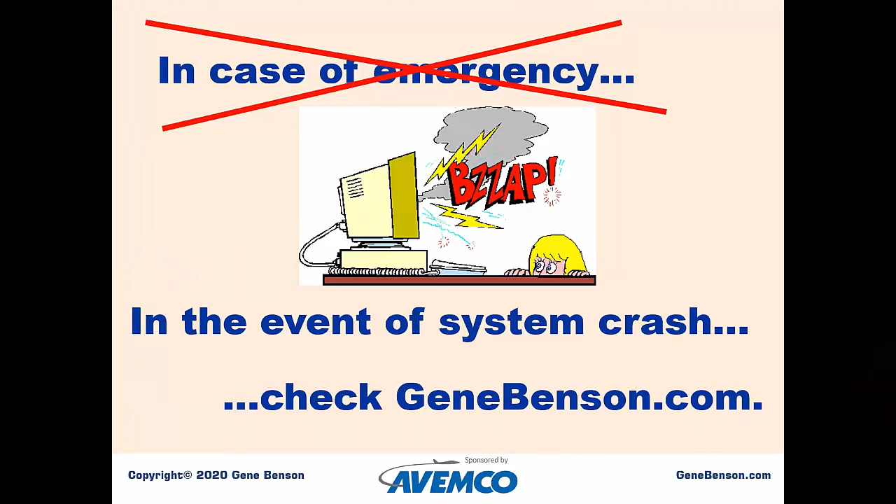If you don't know me, I am Gene Benson. A really quick introduction of myself: my whole life has revolved around aviation. Can't remember when I didn't want to fly. I took my first official flying lesson at age 14, and soloed on my 16th birthday. That was in 1962, so those of you who are math majors can figure that out. I had a great career for which I am very thankful. I've flown everything from jets to Cubs, everything in between. Flight instructing has always been my preferred activity, though as my mother told me, that's very dangerous - but I found out it was dangerous because you might starve to death, as opposed to other reasons. I always had other things going on, but that was my favorite. I've given more than 8,000 hours of dual instruction.

I've continued with my psychology background to do work in human factors. For 5 years I served on the safety committee of the National Business Aviation Association as the human factors person in their fitness for duty working group. I was also an annual presenter at the NBAA convention for a while. I'm a FAASTeam lead representative, and enough about me.

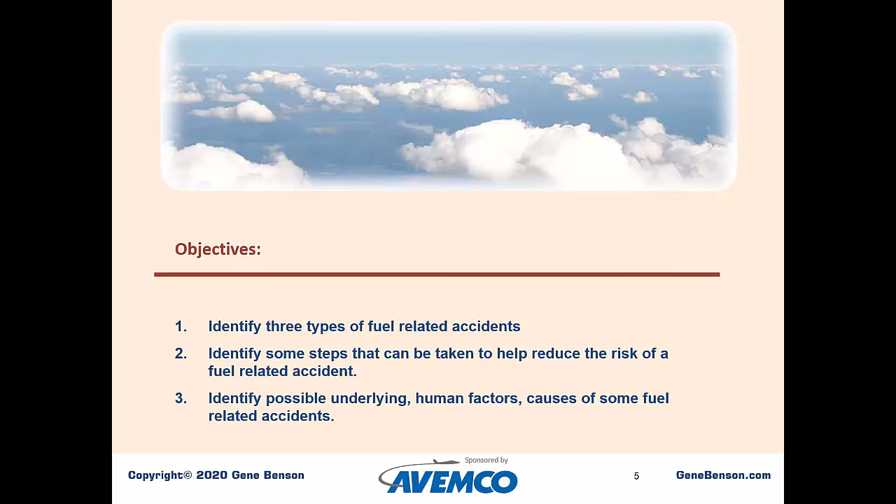Our objectives today: we want to identify 3 types of fuel-related accidents. We want to identify some steps that can be taken to help reduce the risk of us having a fuel-related accident. And I want to identify some possible underlying causes of some fuel-related accidents. Those of you who know me know that's going to take a human factors turn.

I really don't like beginning a presentation with statistics, but we do need to put this in perspective. This graphic is from the most recent Joseph T. Nall report, dated 2016, covering data for 2015 - not real recent, but it's the best we've got. Note that we're only looking at non-commercial flying and fixed-wing aircraft here. The report covers all kinds of things, but we're just looking at this.

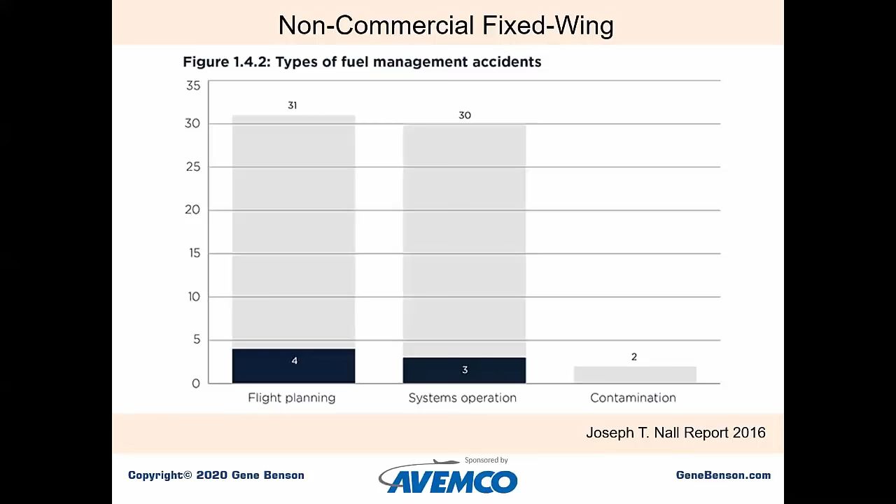This slide addresses 3 types of fuel-related accidents. They call it flight planning, system operation, and contamination. I'm going to call them a little bit different, but you'll see. The numbers are a bit hard to read because they're small, and we have some people attending by audio only, so I will state them. Fuel-related accidents that arose from flight planning, or a lack thereof, totaled 31 for that year, with 4 involving a fatality. System operation accidents totaled nearly the same, at 30, including 3 with a fatality. There were 2 accidents resulting from fuel contamination, and neither of those was fatal.

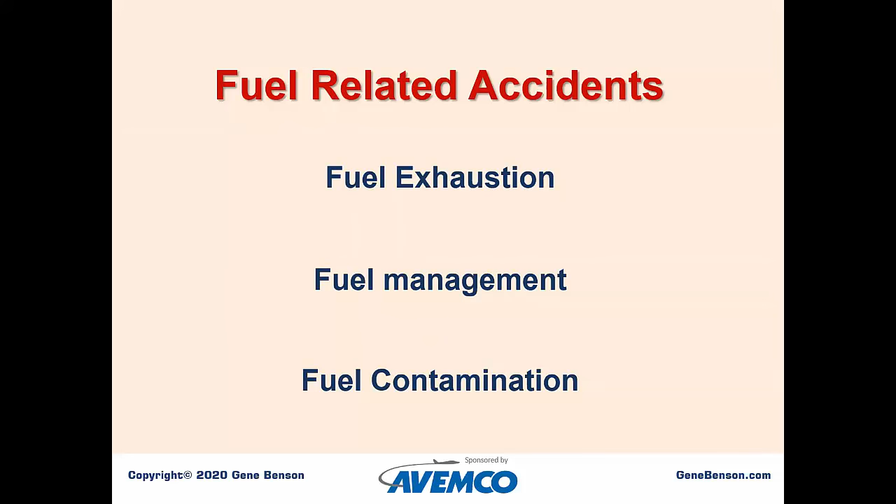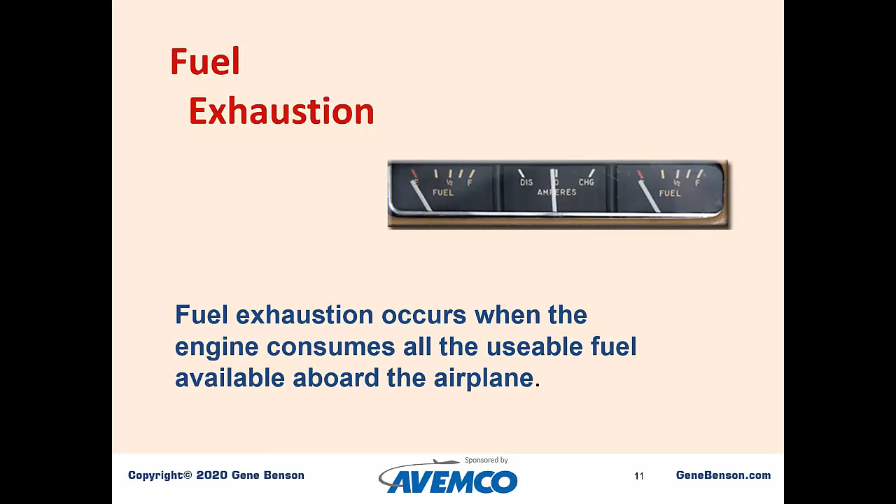We're going to look at fuel-related accidents in basically the same way, but we'll use this nomenclature: our 3 types will be fuel exhaustion, fuel management, and fuel contamination. Fuel exhaustion occurs when the engine consumes all the usable fuel available aboard the airplane - I've referred to that as having too much air in the fuel tanks.

This fuel exhaustion accident involved a Cessna 182, happened in Vermont in September 2013. The pilot and his passenger received minor injuries. Though the official report calls the injuries minor, the 2 men involved probably didn't think so at the time.

Now, before I go on with this, those of you who have followed my work know where I'm going. This 1962 airplane was not equipped with shoulder harnesses. The harnesses would probably not have prevented the broken wrist, but the severe lacerations probably could have been avoided.

I have vowed never again to fly in an airplane that's not equipped with shoulder harnesses, and I would encourage everybody else to do the same. Any airplane, I think, can be retrofitted with at least front seat harnesses relatively inexpensively as things go in aviation. And the statistics on survivability, not just survivability but avoiding serious accidents, is just overwhelming that shoulder harnesses are really important.

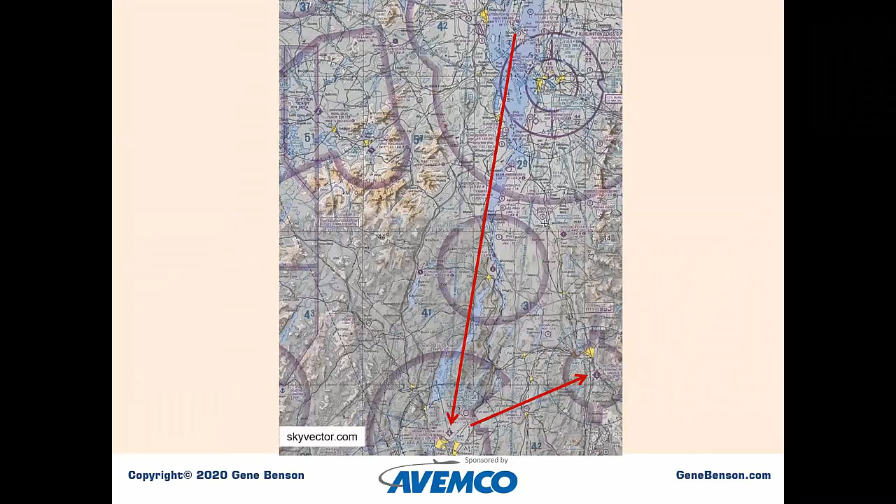This is a closer view of the area showing the proposed diversion route. The NTSB report states that at the time, he noticed that the airplane's fuel gauges were bouncing off empty. That is not a good situation to be in.

And I've flown a lot around that part of the world, and the landing sites there are few and far between. The airplane subsequently experienced a total loss of engine power due to fuel exhaustion, and the pilot performed a forced landing to a field, which resulted in substantial damage to the firewall and forward portion of the fuselage.

The pilot stated that he did not experience any mechanical malfunctions with the airplane, and had he received a full weather briefing prior to the flight, he would have known about the closed airport and planned accordingly. Sounds like an expensive lesson to have learned.

Our pilot was 65 at the time of the accident. He holds a private pilot certificate, single engine land rating. At the time of the accident, he possessed a current Class 3 medical certificate, and he had a current flight review. He reported to have 3,654 hours total flight time, including 2,852 hours in the Cessna 182.

So it certainly seems that he should have been familiar with the rate of fuel burn in that airplane with all that time in it. And that might just be the problem.

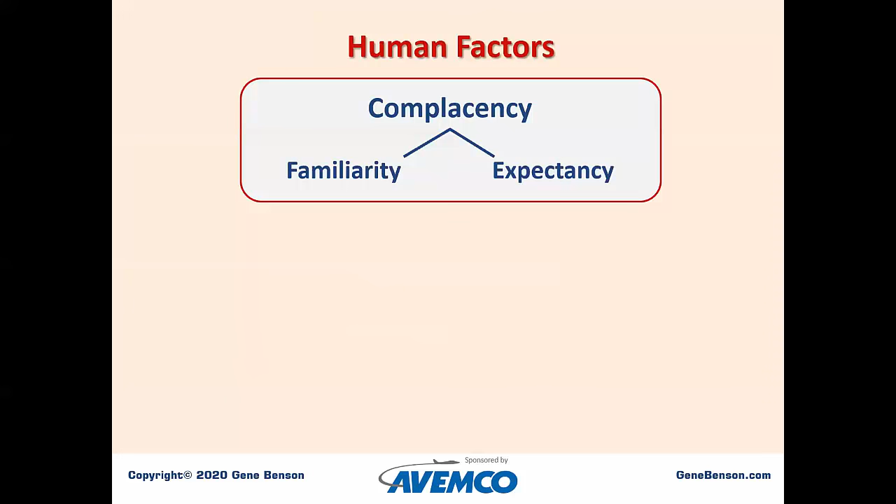Let's take a quick look at this through the lens of human factors. We cannot know the pilot's thoughts, but we can look at some typical scenarios. Remember that complacency is composed of familiarity and expectancy. He was very familiar with the fuel burn and would have been just fine had the airport of choice been open. But he wouldn't have had very much fuel remaining.

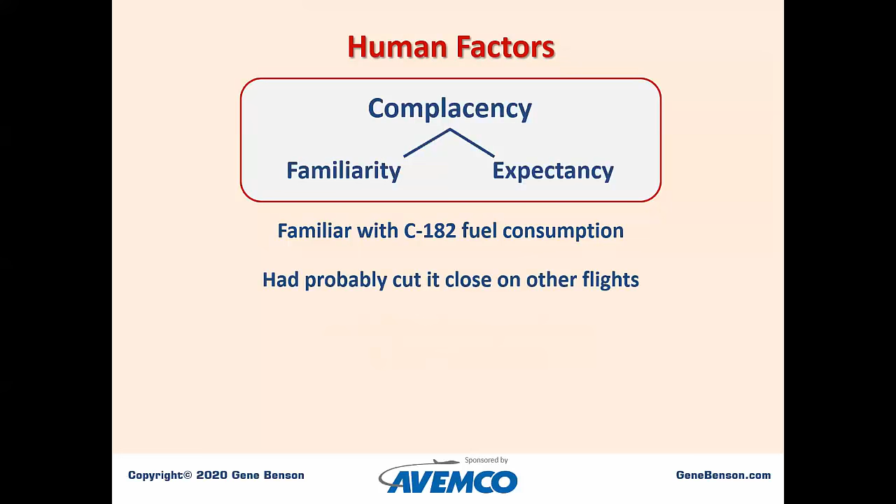Perhaps he had cut the fuel close on other flights and it worked out fine. Each time we cut something close and get away with it, we're positively reinforced to do that again and also to press the envelope a little bit more the next time. So perhaps he had developed an expectancy that it was okay to cut it close on fuel, especially on a nice clear day when it was unlikely that weather would become a problem.

We still doing okay there, Lane?

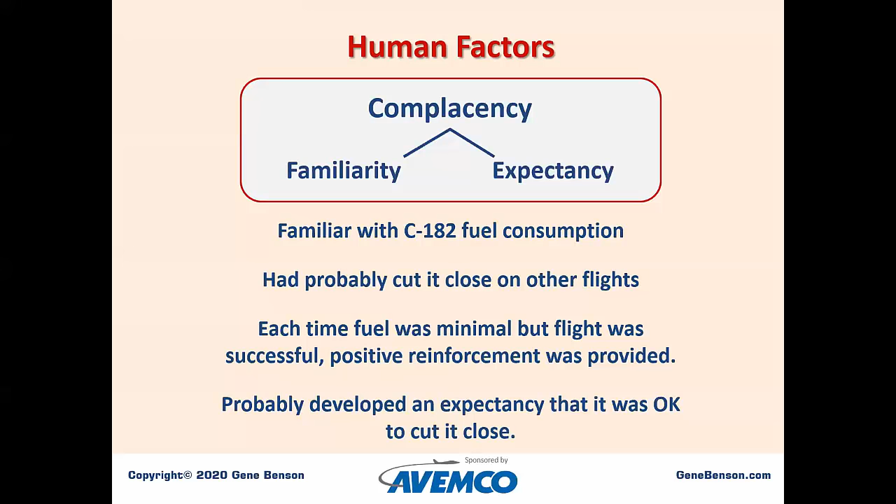Uh-oh. Are we still there? Okay, yeah, can you hear me now, Gene? Okay, gotcha, yeah, we're doing okay. Still looking good. There's one person at least that still can't get it on YouTube, but otherwise we're fine. I think it did not launch on YouTube, and I can't really stop to worry about that, so I guess we'll just have to let that go for this one. Apologize to anybody trying to get that on YouTube.

Again, we don't know the pilot's thoughts, but this accident perhaps illustrates another human factor causal factor: lack of awareness. This is different from a lack of knowledge - this is when we know or understand something but are unaware of some pertinent bit of information. In this case, the pilot knew about the fuel burn of the airplane and the need for enough fuel. He also knew that NOTAMs are issued when an airport is to be closed, and he knew how to obtain that data. But he did not, by his own admission, seek a full pre-flight briefing, and he was unaware that his planned refueling stop was closed for a special event.

All right, let's look at another one. Even highly experienced pilots flying multi-engine turboprop airplanes are not immune from fuel exhaustion accidents. The 7,000-hour plus pilot escaped injury when he was forced to land on a road due to fuel exhaustion in his Beech King Air - this was the B-200, the big King Air.

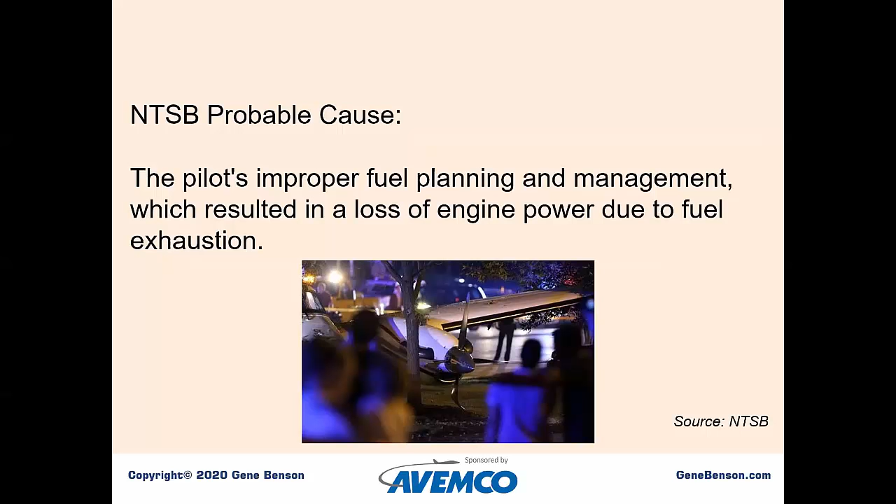I figured my fuel reserve from the last trip the aircraft was flown from Dallas, Texas to Springfield, Tennessee as 230 gallons, which gave me the required flight time plus 45 minutes reserve. I have since the accident refigured the fuel required for the trip and found that I made an error of approximately 30 gallons of fuel per side. My flight plan was opened when I reached 6,200 feet, and the trip actually required 1 hour 47 minutes en route because thunderstorms increased in intensity, requiring approximately a 70 nautical mile deviation. The error in calculating the fuel on the previous trip and the added deviation caused fuel exhaustion. The terrain in the area where the accident occurred was nearly level. The accident was all confined in a 100-foot area.

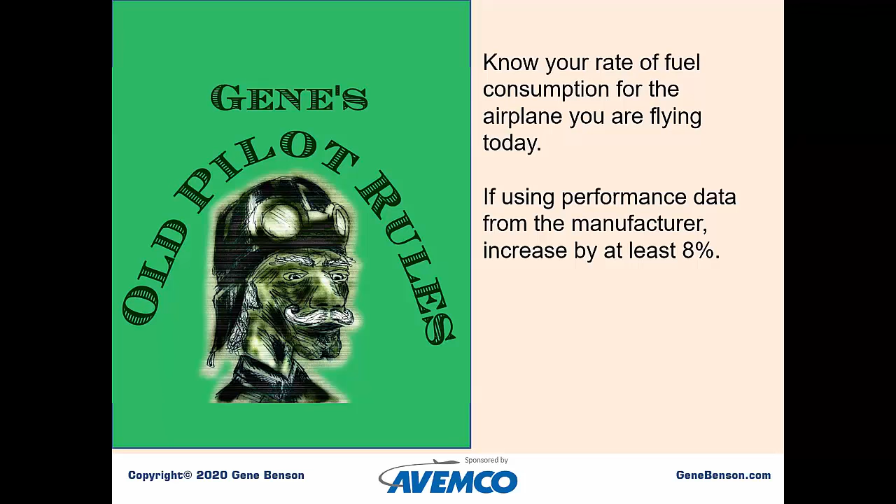Anyway, rule number 2 from the old pilot: know your rate of fuel consumption for the airplane you are flying today. If you're using performance data from the manufacturer, increase it by at least 8%. The airplane may not perform quite as well as the day it was new, and you may not lean the mixture quite as much as the factory would say. So leave lots of reserve, but also add this extra margin to your fuel consumption.

And know how much fuel you have on board, like this last pilot - don't guess, know how much fuel you have on board. If for any reason you can't figure that out, and I know sometimes you can't, if in doubt, top it off, weight and balance permitting. If not, put as much in it as you can, weight and balance permitting. It just isn't worth messing around with.

And finally, our last rule from the old pilot: convert gallons to time. It doesn't matter how many gallons you've got, it matters how much time you have. So convert gallons to time - fuel gauges are notoriously unreliable.

And I won't mention which manufacturer, but I think we all know which ones are totally unreliable.

Always note takeoff time and write it down. I'll say it again: note the takeoff time and write it down. And then let's go old school. Use your Rolex or your Timex or whatever you got to track how long you've been flying, because that really is your fuel gauge. It's your watch, not your fuel gauge on the airplane.

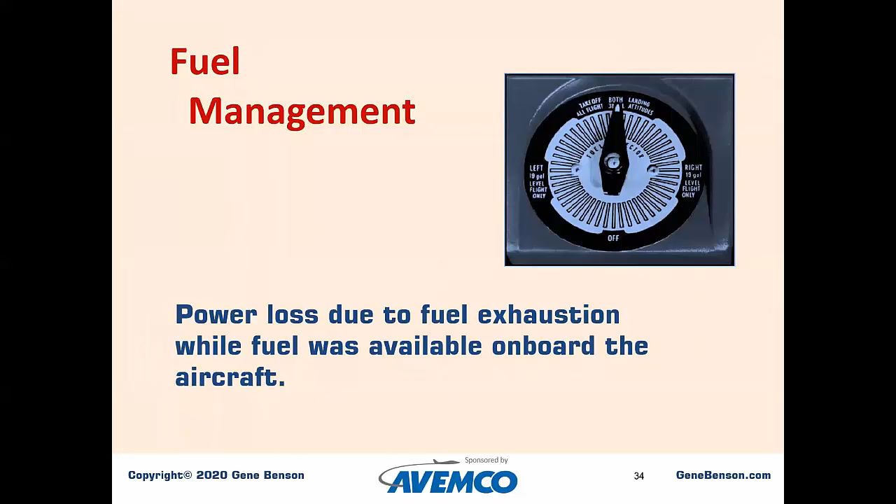All right, moving on, fuel management. These are accidents in which the engine loses power due to a lack of fuel, but there was fuel available somewhere on board the airplane, not in a tank in the baggage compartment, but in another fuel tank.

This fuel management accident involved a Cessna 206 and a Part 135 air taxi operation. Happened in July of 2011 in Maine. The pilot and 2 of the 3 passengers received minor injuries, and the 3rd passenger received serious injuries. This is an amazing story.

The pilot made the takeoff from the island airport. At about 200 feet of altitude, the engine lost all power. The pilot was forced to ditch in the ocean. All aboard were able to exit the airplane before it sank, but for about an hour, they clung onto a section of the airplane's belly cargo pod that separated during the water impact.

The operator's FAA-approved General Operations Manual, Section 10, passenger handling, requires that the pilot give an oral safety briefing before each takeoff, which includes the location of the onboard survival equipment. In addition, a safety information card must be on board in a location convenient for use by each passenger on board. Interviews with the passengers revealed no safety briefing was provided before the takeoff. None of the passengers were aware that life vests or the safety information card were on board the airplane.

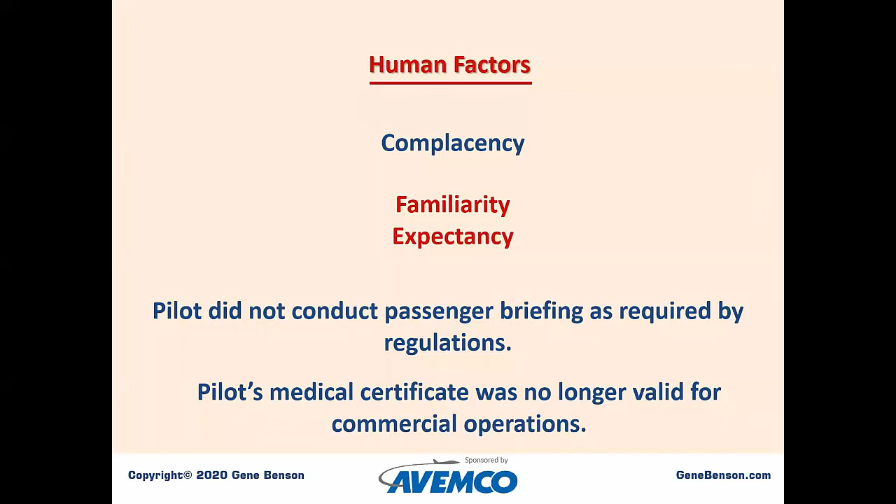As an air taxi pilot, he was required to have at least a valid Class 2 medical certificate, but his Class 2 medical had expired and reverted to a Class 3 a little more than 2 months before the accident. So we're starting to see some evidence of a trend of complacency here. Here's where it gets interesting. The airplane was recovered from the ocean 5 days after the accident.

The fuel selector was observed in the right fuel tank position. The right fuel tank contained about 1 pint of fuel, while the left tank contained 27 gallons of fuel. It would seem that the pilot did not use the before takeoff checklist requiring the fuel selector to be on the fullest tank.

The pilot's statement indicated that as a response to the power loss, he immediately turned on the auxiliary fuel pump. He made no mention of switching fuel tanks, so it can be assumed that he took off on the tank with very little fuel in it. So again, we see complacency on the part of the pilot in not using a before takeoff checklist, or at least not properly complying with the checklist.

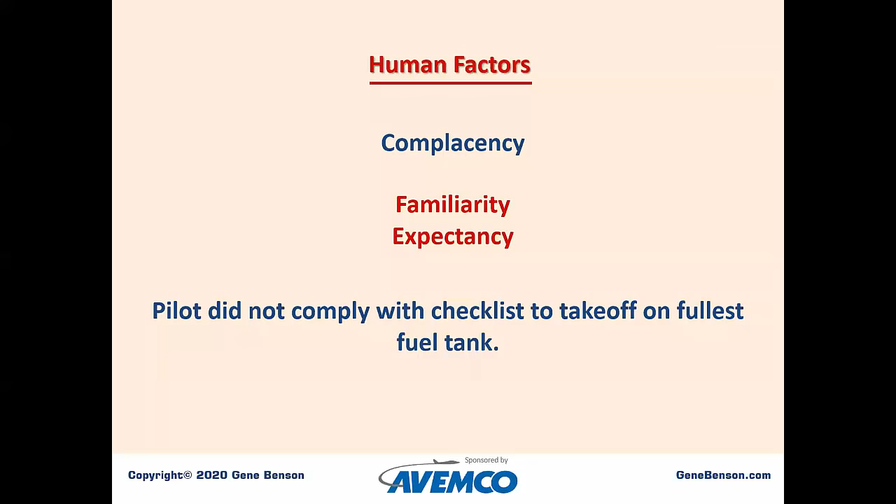NTSB determined the probable cause: the pilot's improper fuel management, which resulted in a total loss of engine power due to fuel starvation.

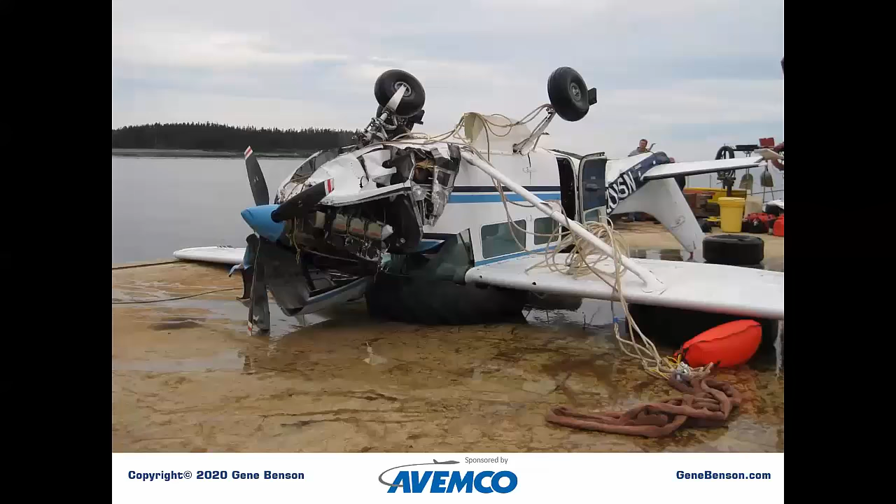And now, if any of you are old enough to remember Paul Harvey, as he would have said, now for the rest of the story. Our pilot was a former airline pilot with more than 25,000 hours. Now, compared to a Boeing 767 or similar airplane, a Cessna 206 is a small, simple airplane. Pretty easy to become complacent and have an attitude that things like briefings and checklists aren't really necessary in such a simple airplane.

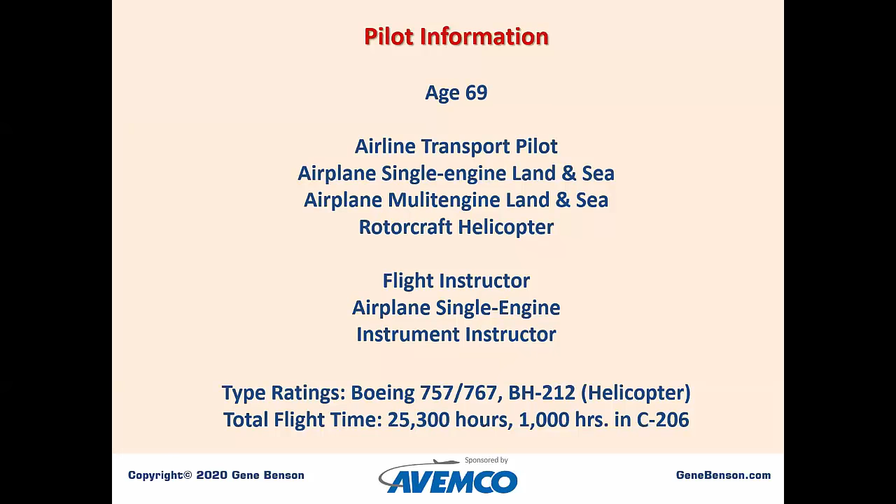So I think this accident is a good example of human factors at work. Obviously, this pilot was not dumb or careless. He had a successful airline career. That doesn't happen for people who are dumb or careless.

His age did not allow him to fly for the airlines anymore at age 69, so he was flying as an air taxi pilot. It appears that he had become complacent and failed to follow procedures and failed to use his checklist. He's not the first airline pilot to fall into that trap.

In a single pilot operation, he did not have a first officer to raise the red flag when procedures were not being followed. He didn't have a cockpit voice recorder and flight data recorder capturing every action and every word. It probably seemed like a very relaxed operation after years of airline flying.

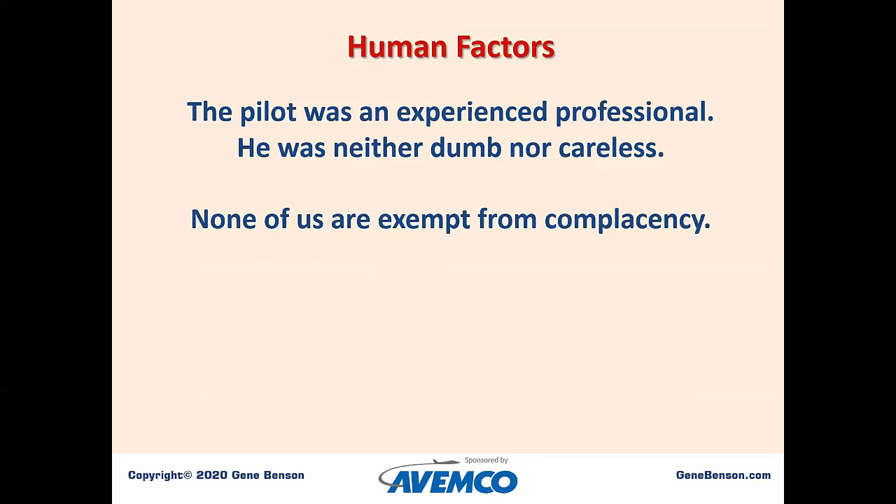Now, I know there are people out there who will raise the issue of possible early cognitive impairment based on this guy's age, but I researched this very thoroughly. I can't definitively say it wasn't an issue, but I could not find any scrap of evidence that showed there was any cognitive impairment there at all. In my opinion, this was a simple case of complacency, and it was a fact of our humanness just taking over.

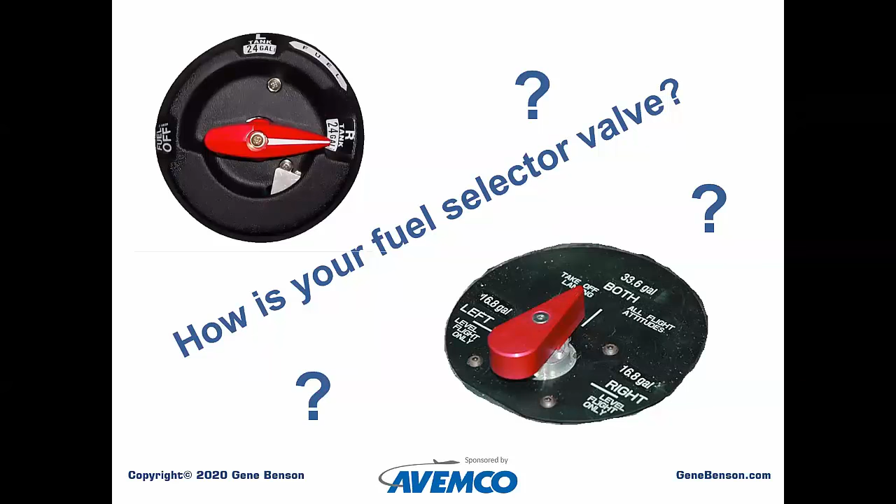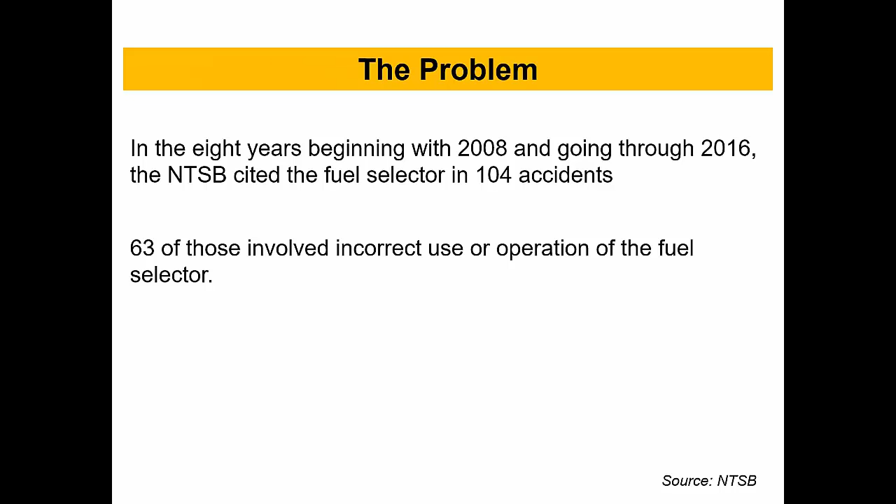After you see this, I'm guessing you're going to want to run right out and check. The NTSB is aware of this, and these are numbers from the NTSB. In the 8 years beginning with 2008 and going through 2016, the NTSB cited the fuel selector in 104 accidents. 63 of those involved incorrect use or operation of the fuel selector, and 28 cited degraded function of the fuel selector. Typically, these types of accidents result in fuel starvation and a loss of engine power.

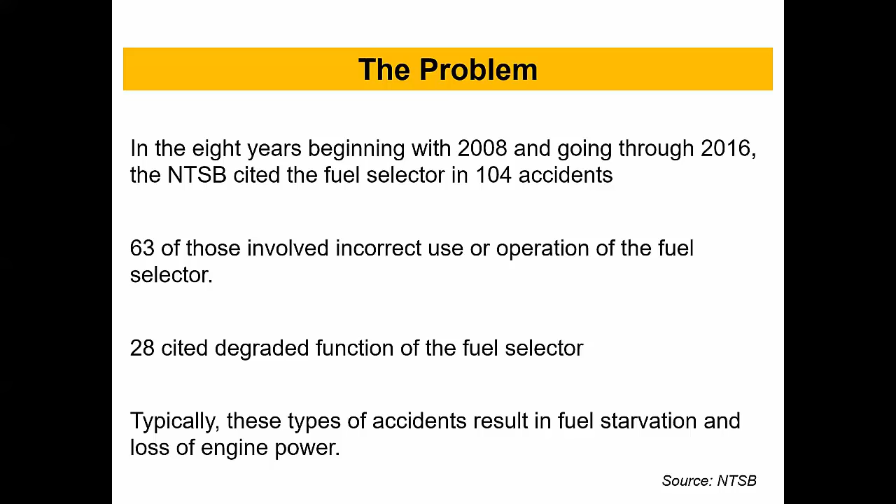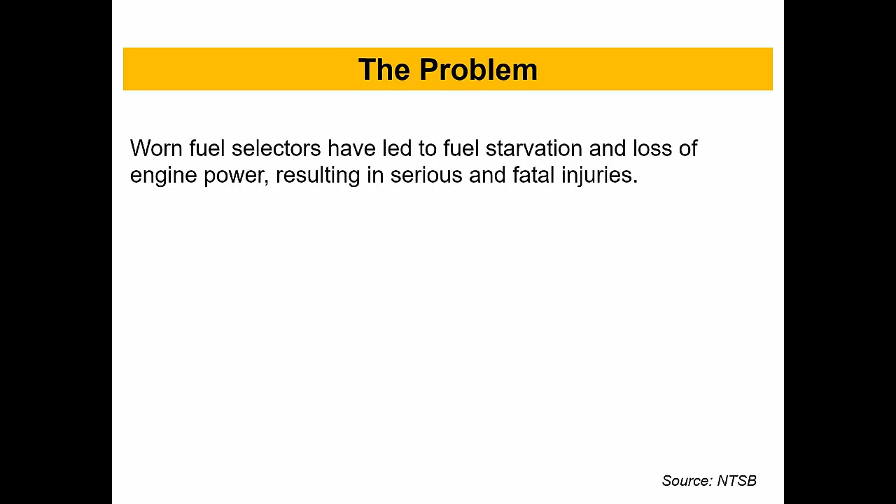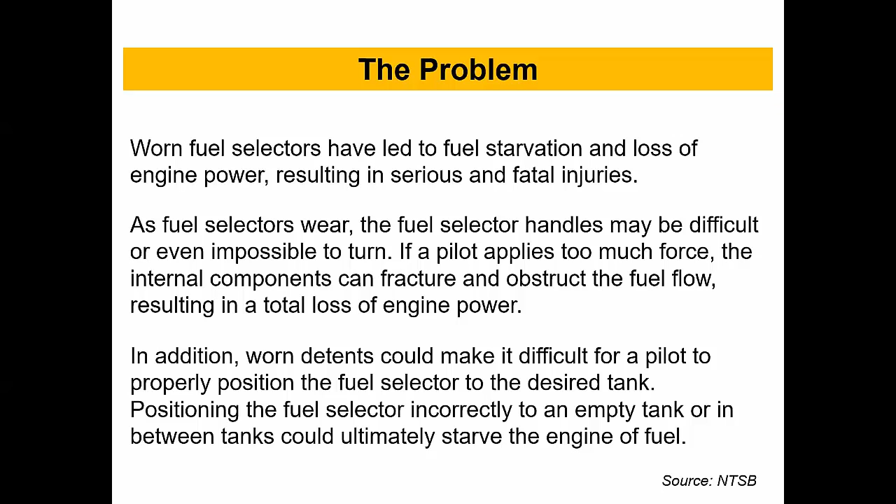Worn fuel selectors have led to fuel starvation and loss of engine power, resulting in serious and, in some cases, fatal injuries. As fuel selectors wear, the fuel selector handles may be difficult or even impossible to turn. If a pilot applies too much force, the internal components can fracture and obstruct the fuel flow, resulting in a total loss of engine power. In addition, worn detents can make it difficult for a pilot to properly position the fuel selector to the desired tank. And of course, positioning the fuel selector incorrectly to an empty tank or in between tanks could ultimately starve the engine for fuel. And this is all from an NTSB safety alert.

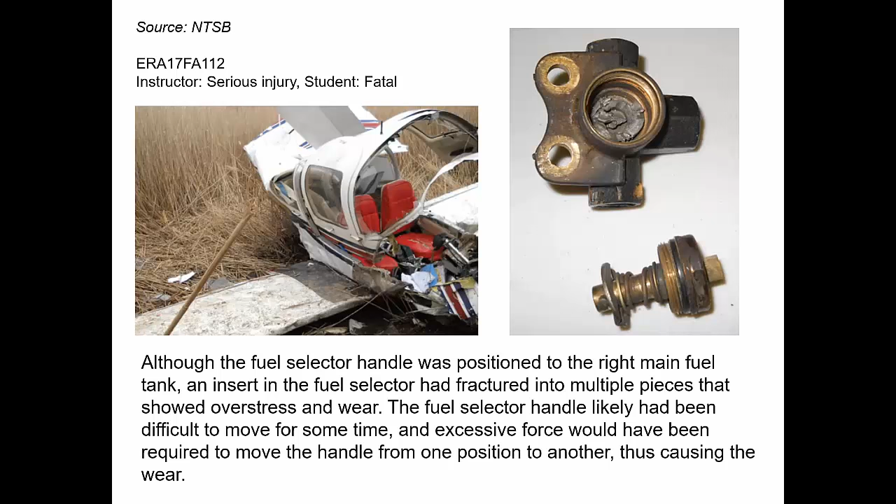This was a dual instruction accident. It was a flight school airplane. The instructor was seriously injured and the student died in the accident.

Here's another one. This involved a Piper Cherokee 140. The NTSB says, although the fuel selector valve handle was in the right tank position at the time of the accident, testing of the valve with air indicated that the valve was closed. The selector valve was stiff to rotate and positive engagement of the detents could not be consistently obtained. Disassembly of the valve revealed rotational scoring in the valve and on the plug cock, which had heavily worn detents. Debris was also found in the valve and was the result of excessive wear. You can see the photo of that there. The pilot was the sole occupant, and he died in the accident.

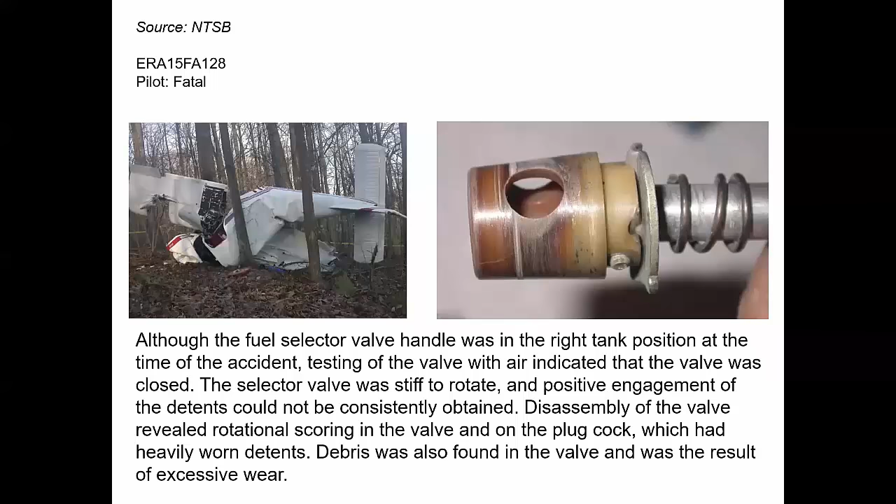So, moral of the story: check that fuel selector in your airplane. It's the little things that get us sometimes. And what are we looking for? It should move nicely, and it should click in nicely. If it's way too loose, that's a problem. If it's really hard to move, that's a problem. Get maintenance to check it out. If it's not your airplane, report it to the FBO, or if you're in a flight club, report it to the director of maintenance for the flight club. Whatever you do, but don't keep going with a bad fuel valve. There's no future in it.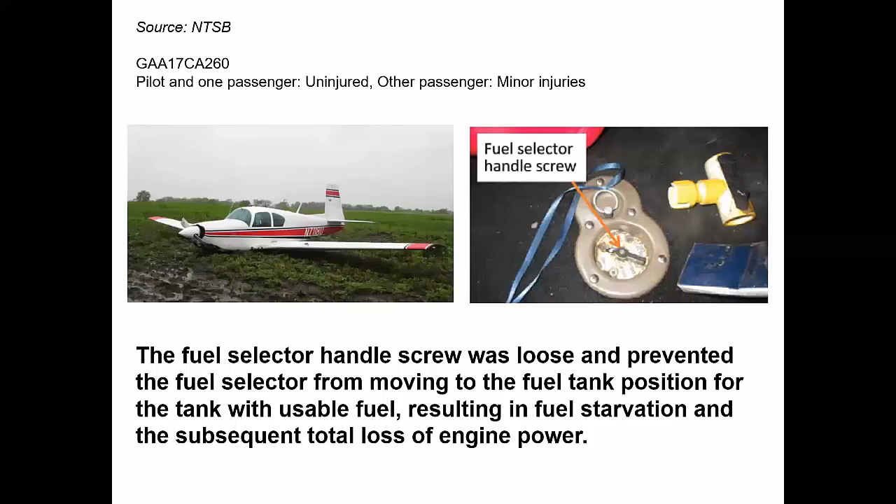Let's talk about our third source of problems here, which is fuel contamination. That involves using fuel that contains water, sediments, or other foreign substances that prevent proper operation of the engine.

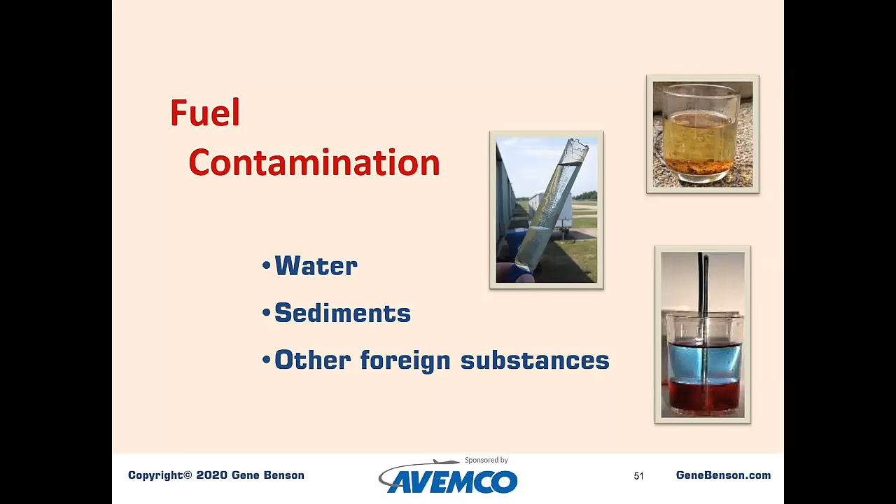Let's look at an accident. The NTSB report contains the following description of the pilot's pre-flight inspection. The pilot stated that he arrived at Morristown Municipal Airport, MMU, about 09:45 and started the pre-flight inspection. He started with preheating the engine compartment. This happened in February in New Jersey, so it was cold.

He noted a total of 38.8 gallons of fuel in the tanks as indicated on the engine digital monitor, which agreed with the airplane's fuel gauges. He visually checked the fuel levels in the tanks, confirming the fuel monitor and fuel gauges.

So far, so good. Before sumping the fuel tanks, he gently rocked the wings to dislodge any contamination that may be present. The left wing fuel tank sump valve seemed stiff and was not easy to sump. That should be a flag. The right wing was unremarkable.

16 ounces of clear blue 100 low lead aviation fuel with no contaminants were drained from the gascolator. He sumped the left wing again and observed 16 ounces of blue 100 low lead aviation fuel with 2 to 3 drops of water. Aha, water.

He completed the pre-flight and removed the heater. The startup, taxi, and ground run-up were unremarkable.

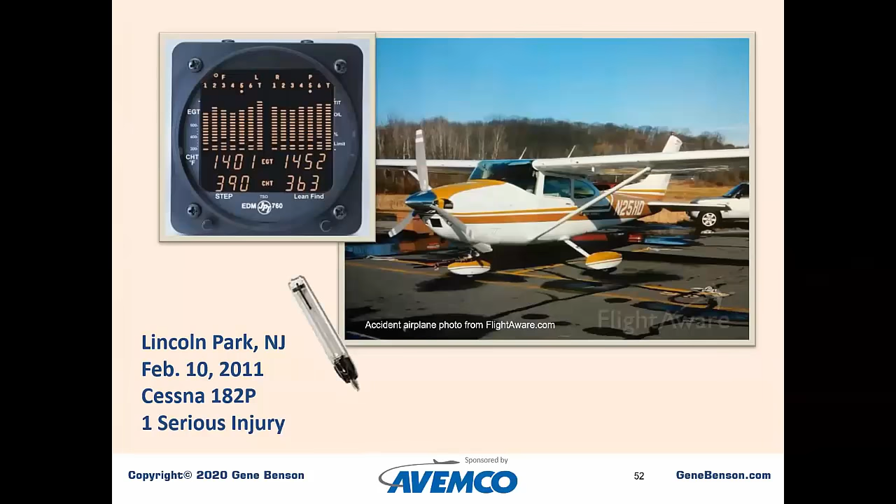The NTSB report continues. After takeoff, the climb was continued to 1,000 feet at full throttle, and power was then adjusted to 23 inches manifold pressure with 2,300 RPMs. Thereafter, leveling the airplane at 1,800 feet. During the cruise to November 07, he monitored the carburetor heat gauge and adjusted as required.

Nearing November 07, he started to descend to pattern altitude of 1,200 feet and entered the downwind for runway 01 on a 45-degree entry. On the downwind, he throttled back and adjusted the descent to an airspeed of 90 miles per hour, lowering the flaps to 10 degrees. He throttled back more to maintain the descent and applied full carburetor heat.

Once abeam from the runway, he attempted to add power to slow the descent and noted no response from the engine. He pumped the throttle twice with no response and immediately established a best glide of 80 miles per hour, pumping the throttle and ensuring the carburetor heat was on.

He retracted the flaps and moved the fuel selector to the right wing fuel tank. He started the base leg and continued toward the runway. He pulled the engine fuel primer out and gave it a pump.

The engine momentarily went to full power and died. He turned toward the runway and pumped the primer one more time. The engine went to full power and turned off. He tried it a third time, to no avail. He realized that the airplane was not going to reach the runway and elected to turn east toward a tree line. He flew the airplane into a tree to avoid hitting a building.

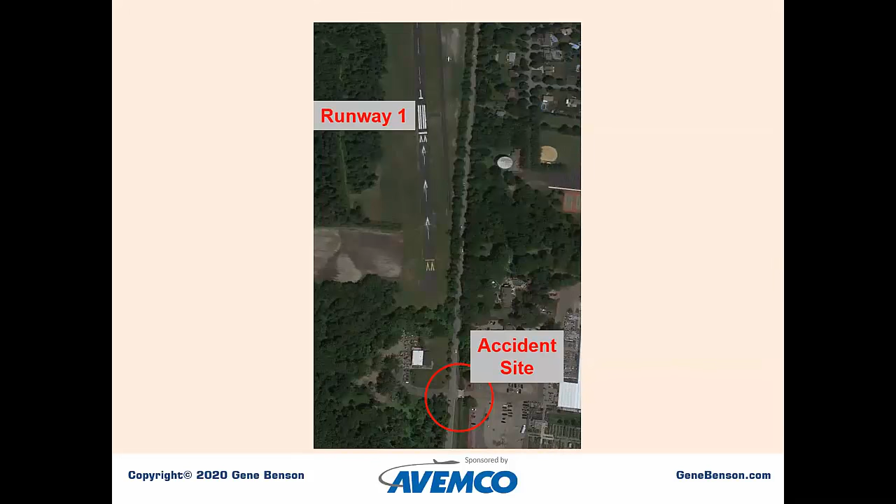You can see in the graphic there where the runway is and where the building is that he would have hit.

According to the responding FAA inspector, the airplane impacted a tree about a quarter mile short of the approach end of runway 01 at November 07, adjacent to a parking lot. Damage to the airplane was consistent with the airplane in a nose below the horizon and right wing low attitude at the time of impact.

The top wing section across the fuselage separated, exposing the cabin area. Forward and aft windshields were shattered. The left wing remained wrapped around the tree. The right wing's outboard leading edge was crushed. The fuselage came to rest on its right side. The empennage came to rest over the right wing, bent down toward the right. The engine and cowling separated from the firewall. The propeller remained attached to the engine. Two of the three blades were bent aft, and all three blades were observed in a low pitch angle.

I think this airplane is over. What do you think?

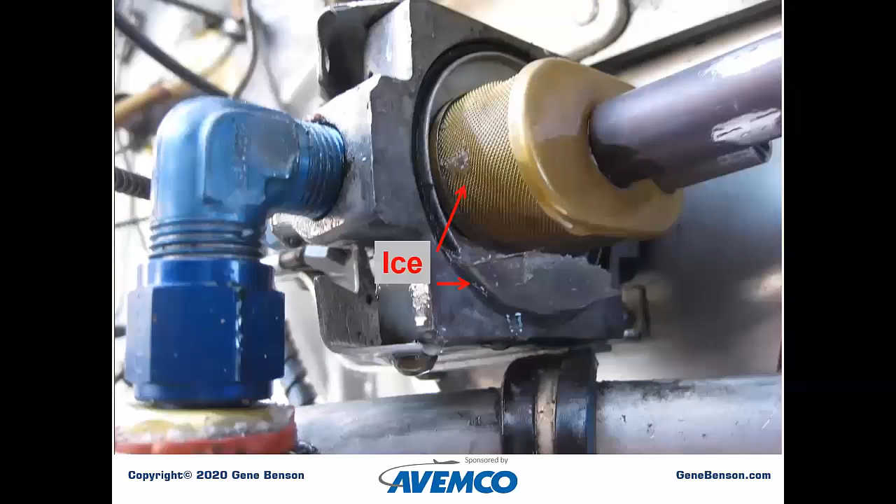Post-accident examination found ice and evidence of water in the gascolator fuel bowl shortly after the accident. A recovered engine digital monitor recorded the accident flight and captured the last 25 seconds. The monitor indicated that the fuel flow dropped to zero and the exhaust gas temperature on all cylinders dropped sharply, consistent with combustion stopping abruptly, likely due to the introduction of water into the fuel system.

The engine compartment was heated before the flight. The temperature was -5 degrees Celsius at the time of the pre-flight, and no water was noted when the gascolator was drained before the flight. Remember, the gascolator had ice in it after the accident. The accident flight was flown on the left wing fuel tank.

The pilot stated that during the pre-flight, he had difficulty sumping the left wing fuel tank and noted a few drops of water when the sump valve did function. He did not resump the tank.

An AD was established to prevent power loss or engine stoppage due to water contamination. The AD stated that after rocking the wings, the pilot should drain and catch the contents of the fuel gascolator, wing, and, if equipped, reservoir tank sumps and check for water contamination. If water is found, repeat until no additional water is detected, or drain the entire airplane fuel system. End of quote on that one.

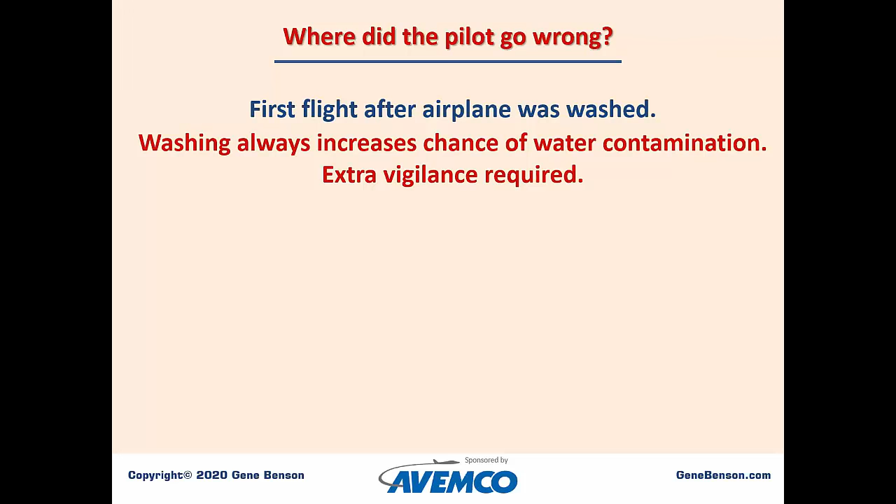The surface temperature was -5 degrees Celsius. The hangar was apparently not heated, since the pilot stated that he began his pre-flight inspection by preheating the engine compartment. He reported that he gently rocked the wings to dislodge any contamination.

Now, we don't know — how long did he wait to sump the tanks again? Rocking the wings may dislodge water contamination, but it takes a couple minutes for it to make its way to the lowest point, which is supposedly the drain valve.

The left wing fuel tank sump valve seemed stiff and was not easy to sump. The right wing was unremarkable. Why was that left wing sump stiff? That should raise a red flag that something is wrong. In sub-freezing temperatures, we should suspect some ice. After all, the system did what it was supposed to do.

Some water got into the system, either during the wash or through condensation or some other way. The water settled to the lowest point, which was the fuel drain. But the temperature was below freezing, so it froze. Now that drain is just screaming at us that it's frozen.

A frozen drain can only mean one thing — there's water somewhere. That gasoline didn't freeze, okay? That water might be in the form of ice, which is likely to melt once that fuel starts sloshing around on it. The temperature was not that far below freezing. Now, had the temperature been minus 20, there might not have been a problem at all because that ice would have stayed frozen.

16 ounces of clear blue 100 low-lead aviation fuel with no contaminants was drained from the gascolator. He sumped the left wing again and observed 16 ounces of clear blue aviation fuel with, quote, 2 to 3 drops of water.

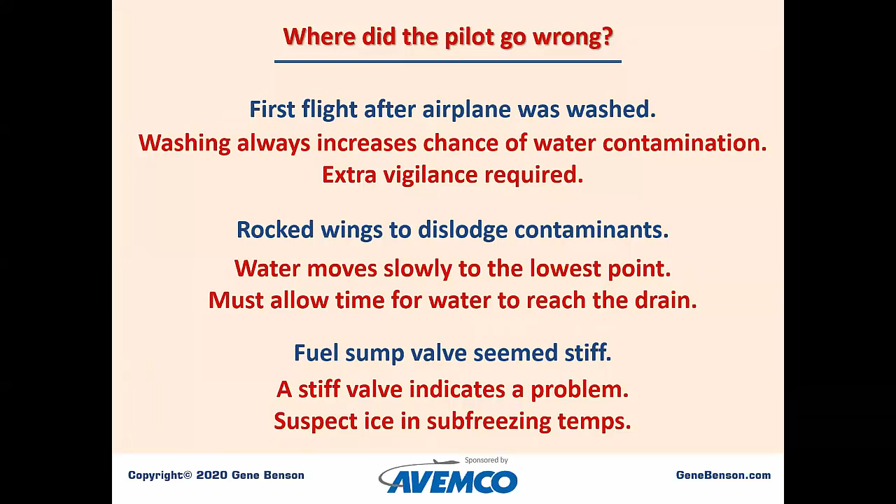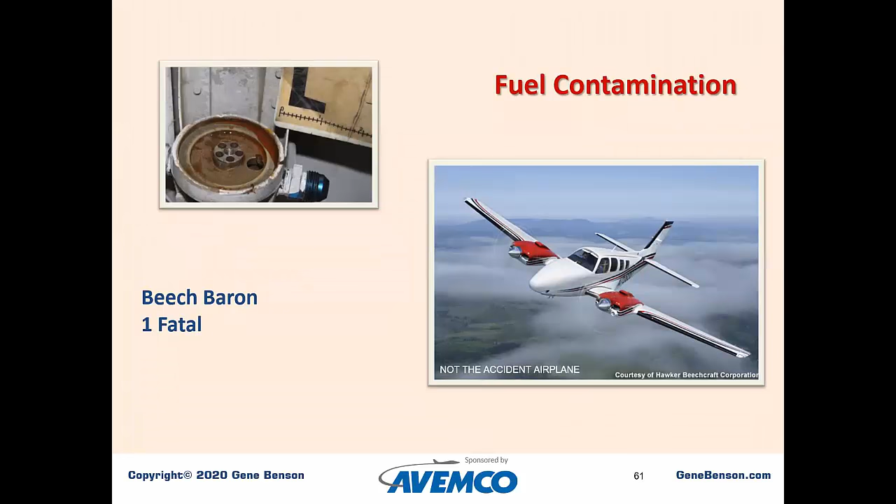All right, I want to discuss one final accident that once again involves fuel contamination. This one takes a different turn than the usual common ones in which the pilot did not detect or remove the contamination from the fuel. I'm not going to provide identifiable details in this accident because I don't want anybody to identify the people involved, either the deceased pilot, the previous airplane owner, or the technician who signed off the annual inspection. So you know it's going to be bad when I say that.

This accident might be an example of one of the common accident causal factors, which is called lack of resources. That could mean not having the financial resources to properly maintain an airplane or to maintain pilot proficiency, or both. A corollary of lack of resources could be excessive frugality—I named that one, that's not an official term—and that would mean having the resources to financially take care of things that need to be taken care of, but not wanting to spend the money on maintenance or pilot proficiency training to get there.

All right, that being said, here's the story. Pilot was departing his home airport to fly to another airport to refuel the airplane. Witnesses reported that the airplane lifted off from the 1,800-foot-long grass runway. The left engine lost power, the airplane rolled left and impacted the ground inverted in a wooded area near the departure end of the runway.

Rust-colored water was detected in various fuel system components from both engines. Further, the strainer drain lines and outer tank drains in both engines' fuel systems were partially blocked by rust-colored debris. Post-accident examination revealed evidence of long-term water contamination of both engines' fuel systems due to leakage past the fuel caps, which are normally replaced on an on-condition basis during maintenance. The engine failure was likely due to water contamination in the fuel system, which was not detected by the pilot during the pre-flight inspection.

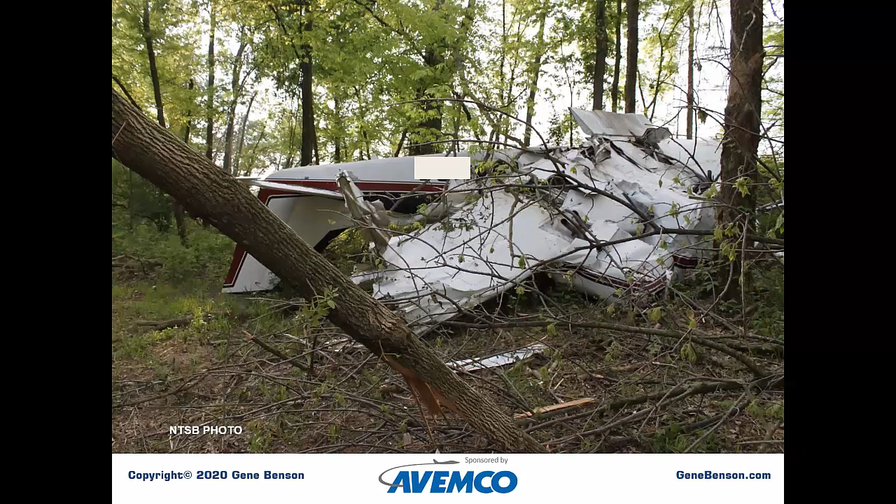A review of the airplane maintenance record revealed that the only entry related to the fuel filler cap since the airplane was manufactured was about 18 months prior to the accident, at which time the left fuel filler cap was replaced and an outer O-ring of the incorrect dimension was installed.

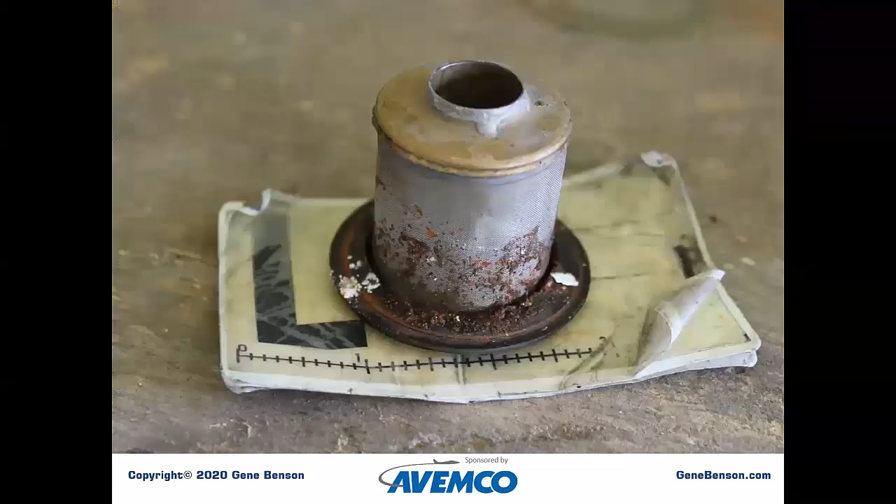The Airplane Pilot's Operating Handbook and FAA-approved Airplane Flight Manual indicates that during a pre-flight inspection, the fuel sumps in the left and right wheel wells and the fuel drains in each wing are to be drained. Section 8 of the POH/AFM indicates that on a daily basis the snap-type fuel drains should be opened to purge any water from the system.

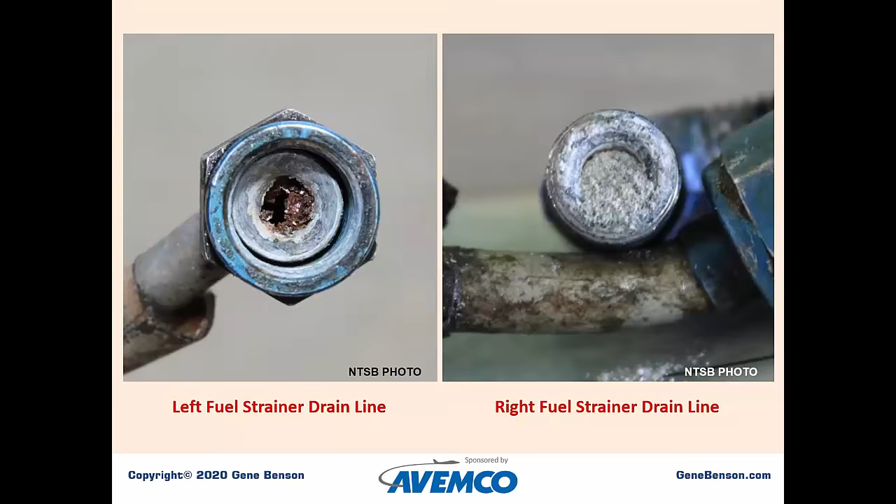So again, I want to stress, I don't know the reasons, and they may or may not include lack of resources or excessive frugality, but this airplane was clearly not well maintained. The poor maintenance did not come from a single decision or a single error. These photos indicate a lack of quality maintenance, at least of the fuel system, over an extended period of time. The NTSB report details extensive post-accident inspection and testing of the fuel system, especially the fuel caps, with multiple findings of extensive corrosion, leakage, and faulty O-rings.

The annual inspection had been signed off one day before the pilot purchased the airplane, about 4 months prior to the accident.

Okay, I'm going to editorialize a little bit here. After more than 50 years of flying and more than 40 years in the aviation business, I have purchased many airplanes, some for myself and some on behalf of my employers. I've learned from experience that buying an airplane with a, quote, fresh annual, unquote, is not always the best way to go.

Unfortunately, we have annual inspections and we have endorsements for annual inspections. The airplane getting inspected just prior to the sale, with the inspection and necessary maintenance being paid for by the seller, might not be the most rigorous inspection.

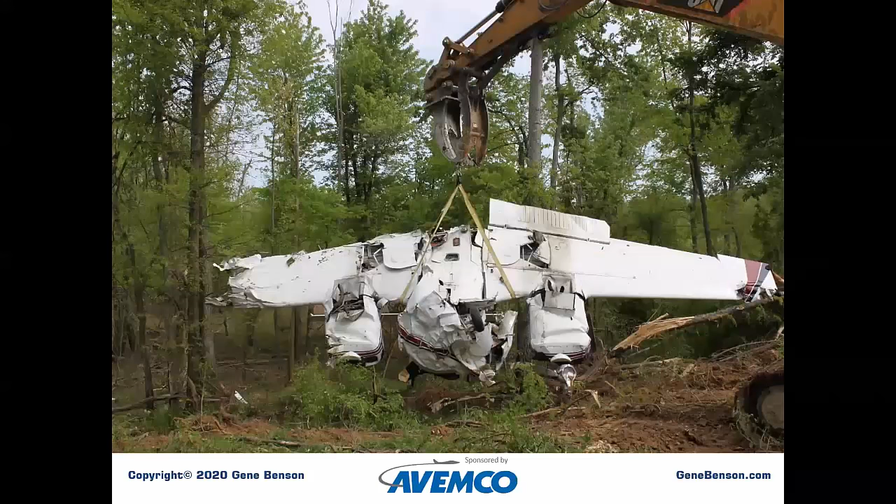The buyer who is looking to save money by buying an airplane with a fresh annual and having a full year without having to do an inspection might be seeing, at best, a false economy, or at worst, a dangerous situation. In my opinion, the expense of a thorough pre-purchase inspection by a technician that you know and trust is very much well worth the money. None of us want to end up like this.

The pilot owner of this airplane may or may not have been a victim of lack of resources or excessive frugality. I don't know. But for whatever reason, he was either aware of problems associated with the fuel system and chose to ignore them, or he did not do pre-flight inspections. Whichever the case, it eventually cost him his life.

We can't determine the last time this pilot reviewed or practiced engine out procedures. The loss of an engine on takeoff, especially from a short runway, can be catastrophic if the pilot isn't razor sharp to respond. Many multi-engine pilots, unfortunately, take their flight reviews in Cessna 150s or 152s to save money. That's completely legal—it renews you in everything you're rated to fly, including helicopters, gliders, gyrocopters, whatever. Completely legal, but it's a false economy that might be a result of lack of resources or excessive frugality.

I know that there are multi-engine pilots flying around out there that have had their rating for 15 or more years, and the last time they experienced an engine out was on their check ride for their multi-engine rating. So, all right, enough of my pontificating here.

Any discussion on this one? I see one hand up. It might be from the last time. We'll see—it is John. John, I think I opened your microphone. Go for it. Yeah, thanks, Gene.